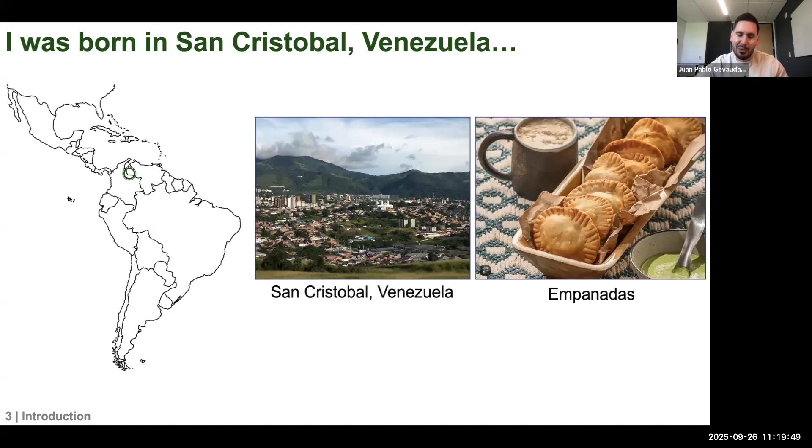And something that we have that is delicious and I am personally obsessed with is empanadas. I won't go into the difference between empanadas and what I'm showing here, which is pastelitos. I will need like another 45 minutes to really go into that detail.

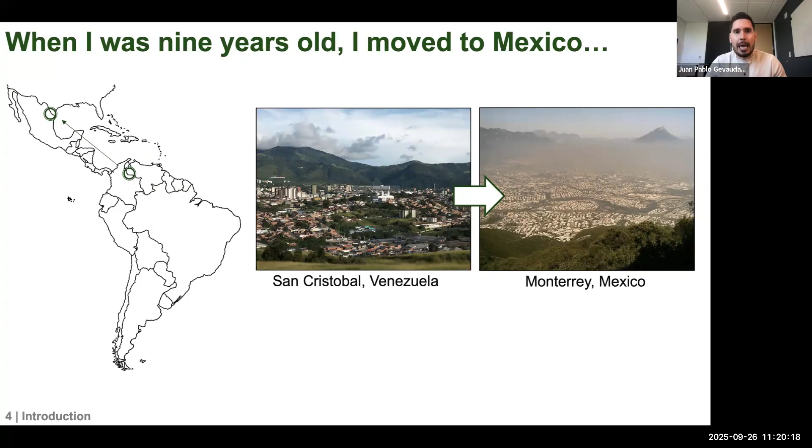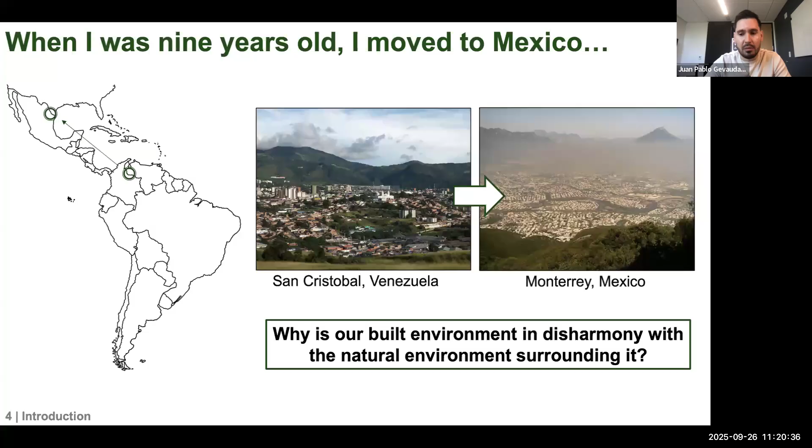But when I was there in Venezuela, I was fortunate enough to move to Mexico. And I saw something very different. When I went to Monterrey, Mexico, which is a place where me and my family would go to have picnics in the mountains, when we looked at the city, we saw this city covered with smog, right? And between where I was coming from in Venezuela to where I was in Mexico, it really created this question in my head around why is our built environment in disharmony with a natural environment? Why is that? And from an early age of 9 to my teenage years, I really had that question really form my passion for research, but also sustainability.

And of course, after going from, sorry, I just got a call.

But from going from Venezuela to Mexico to then Montana for high school, I was really developing this research vision. And it wasn't until I went to UT Austin, my bachelor's in civil engineering, that I found a passion for sustainable concrete materials. And I was fortunate enough to work with Dr. Maria Juenger, where I was able to get introduced to the wonderful world of cement chemistry.

After that, I did my master's and PhD in architectural engineering, where I found that in order to have any sustainable solution, we really need durability. And I spent a lot of time looking at acid durability of alkali-activated materials as a really great solution that could be sustainable. After that, I did a research fellowship at the University of Leeds with Dr. Susan Bernal.

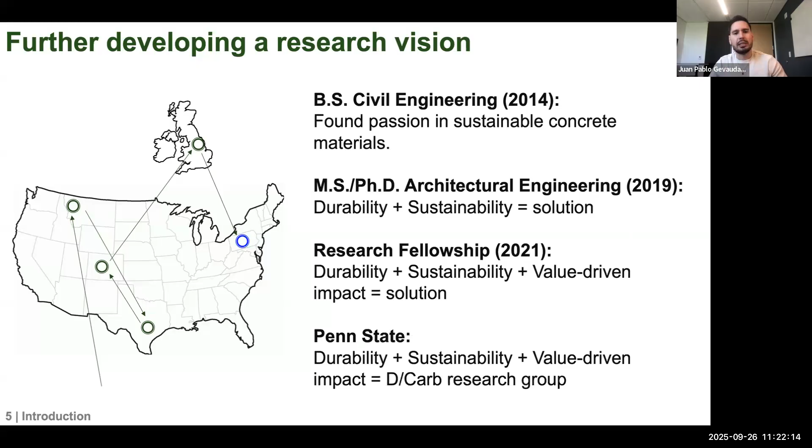And that is where I started to picture that, yes, sustainability and durability need to be part of any solution, but really, what are the technologies that are really driving value? Where should we spend most of our research energy so that we can have the most impact? And with that idea, I came back to Penn State and created the D/Carb research group.

Now, the D/Carb research group focuses on exploring the chemistry, both early and late chemistry, that dictates the process-structure-performance relationships of cement chemistry systems. Particularly, we're very interested in any cement chemistry system that has silica, a divalent cation, and carbonates. That's where we really light up and our curiosity shines.

Now, the work that I'm presenting today is thanks to the wonderful team of graduate student researchers and research technologists that we have here at Penn State. I am truly blessed to work with an amazing team. So thank you to all of them, and you'll see some of their results here today.

So now to the topic that we're here for, right? Why is there a global imperative to decarbonize the concrete sector? I know that you have had amazing speakers in this series that have addressed this topic, including Dr. Maria Juenger. Today I want to provide a slightly complementary perspective, but also look at some of the current data for where we are, how we're doing, and where we need to go.

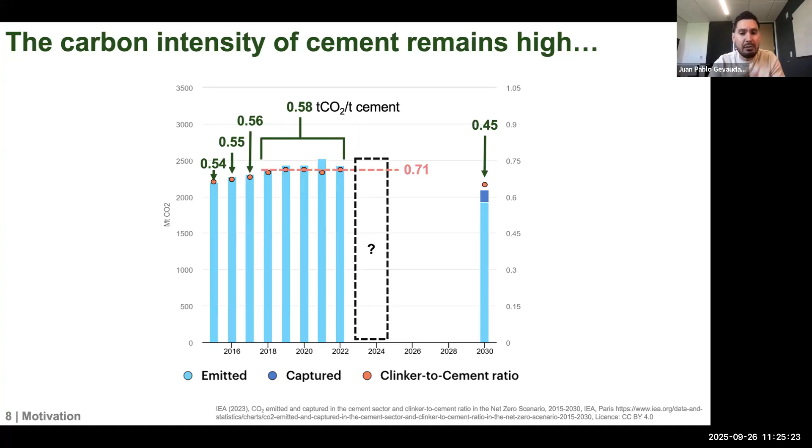But what has happened over the last few years? I couldn't find any data, so if anybody has data over the past few years, I would love to see it. But what I did find is our CO2 process emissions from cement manufacturing globally. And we see that since 2021, we have been decreasing CO2 emissions for cement manufacturing, which a lot of you may think is really great news in terms of total volume of CO2 emissions due to cement.

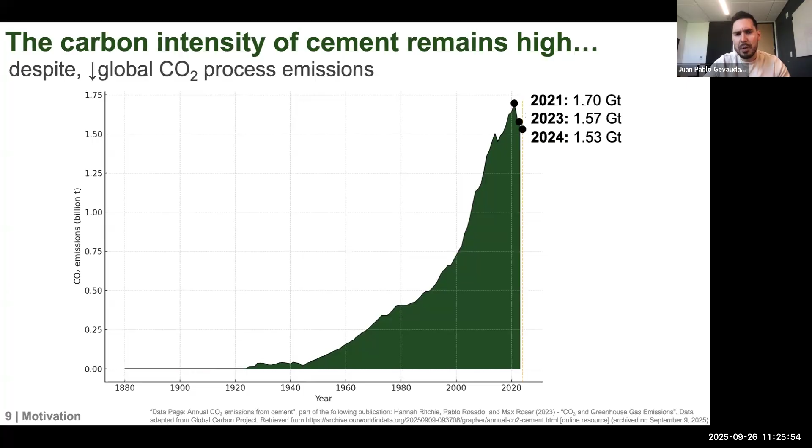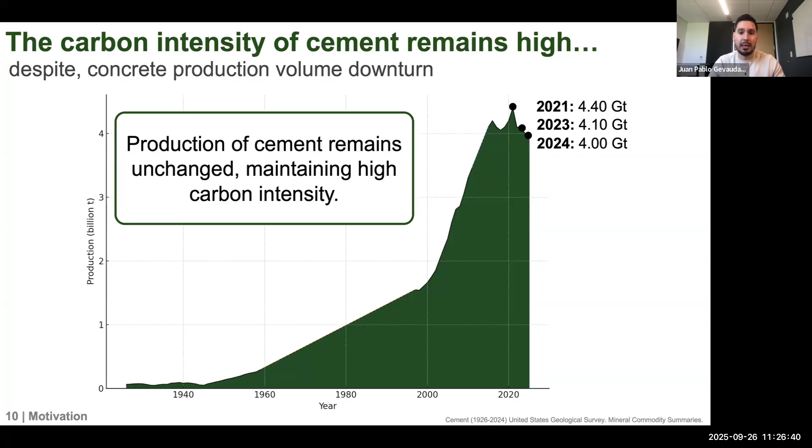But the reason those CO2 emissions have decreased is a concrete production volume downturn, particularly in the Chinese real estate market. We're producing around 4 gigatons of concrete from last year, and that's where we think we'll be stabilizing for at least a couple more years. The key takeaway is that the production of cement remains unchanged, and that's why we're maintaining that high carbon intensity in cement production. So we really need to think about how we're going to decrease cement carbon intensity.

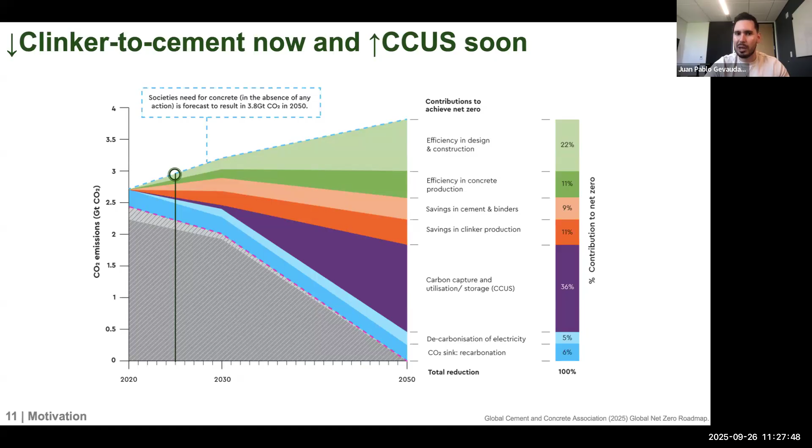A few different roadmaps have been published, and I noted here the Global Cement and Concrete Association roadmap. Of course, this is for concrete, so it takes into account not only process manufacturing, but also the fuel emissions and the concrete. In order to reach decarbonization by 2050, we need to implement a wide variety of strategies. A lot of them are efficiency strategies, like reducing the clinker to cement ratio, which we need now, but the one contributing the most to the net zero path is carbon capture, utilization, and storage. That space has a lot of different developments that we're going to be discussing today.

So why is this important? In the US, we see that SCMs have been utilized since the 1940s, particularly fly ash.

We know fly ash, that's great. But right now, poor supply logistics for the US actually inhibit the utilization of SCMs in concrete projects. This is particularly because not only is our supply of fly ash, which we know and love, decreasing, and has decreased by 65% in the past decade, but also it's because a lot of imported SCM options, yes, they're cheaper in a lot of senses, but can they get to the project? And that's what we mean by supply logistics.

Now, the other component of this is that there has been a lot of work on harvesting fly ashes. There's a lot of excitement towards using and reclaiming some of these fly ashes that have been ponded or landfilled. But even the Coal Ash Association does say that this is going to meet the demand for the next 90 years. So what I really want to encourage us all to think is future needs, right? We need to increase our domestic production of SCM at low prices that can actually compete with imported material alternatives. That's really what we need. And we need that production to happen near metropolitan areas where that concrete is actually being utilized.

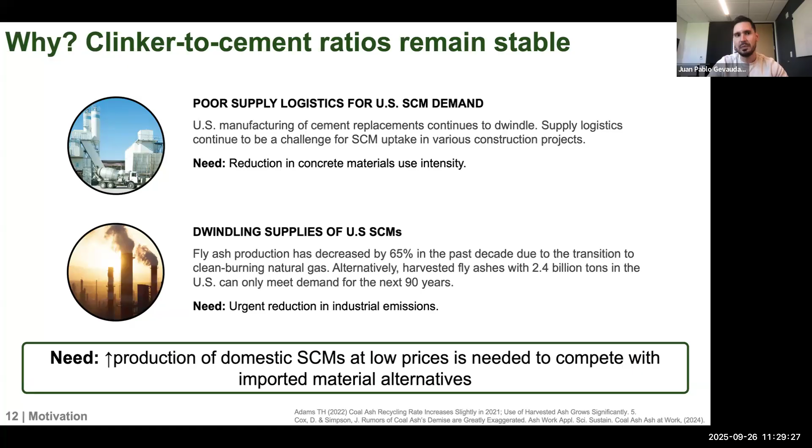All right, when we look at the other side, carbon capture, utilization, and storage, one thing that we need to keep in our minds is that the cost of CO2 is actually really high. It's around $350 to even $150 per ton of CO2 removed. And that, of course, is these complex plants that actually require high capital expenses and high operational expenses to keep this carbon capture and storage going.

Another component of this is that the installation of this technology is quite complex. We need multi-year assessments of the cap rock integrity, the geology. We need pipelines to pipe CO2. And oftentimes where the emission happens, where that cement plant is, may not be near a basalt cap rock that can actually take and store that CO2.

Interestingly enough, there was one study that looked at the feasibility and the economic impact of including carbon capture and storage in cement plant and concrete production. And they estimated that it would be a 10% premium for installing and utilizing this technology for that concrete end product. But do clients want to pay for that premium? That's another question here.

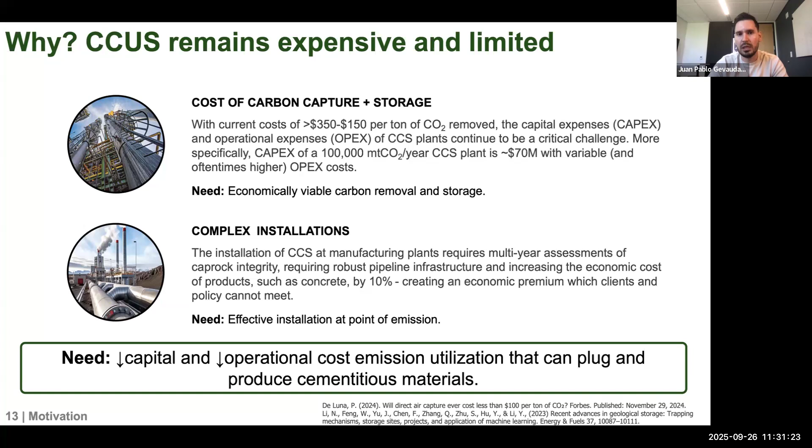So the need that we have here from our current progress in carbon capture and storage is that we need it to be a low capital, low operational cost, and almost a plug and play option and solution that can actually decarbonize different cement plants or different emitters of CO2. So with that in mind, I just painted the picture of the problem that really motivates our research.

And here at the Decarb group, we have two different research thrusts, one in process innovation and one in materials innovation. Now, for the first part of this talk, I'm gonna focus on the process innovation. This idea of, how do we create these plug and play carbon sequestering processing technologies that can also produce concrete products of interest, whether they're cement replacement, fillers, aggregates, and even precursors to alternative cements.

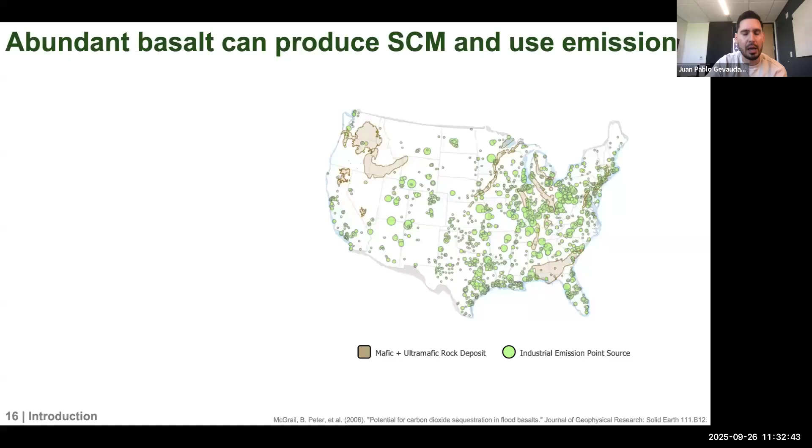So in this realm, we have been really interested in basalt. Basalt is really abundant throughout the US, and what you can see in this map published in 2006 is that the orange, brown areas are basalt and other mafic, ultramafic rock deposits. And the green is industrial emission point sources, and the diameter of those circles dictates how big that emission is. And we have some correlation between the two, not strongly, but it is available. Where basalt is, we have an emission usually, right?

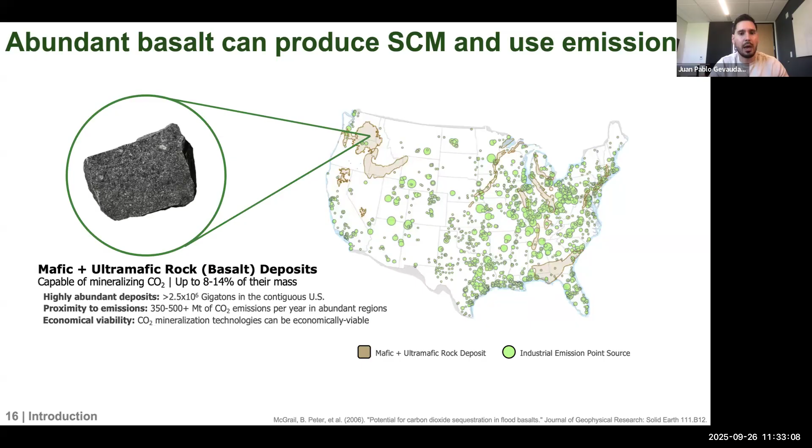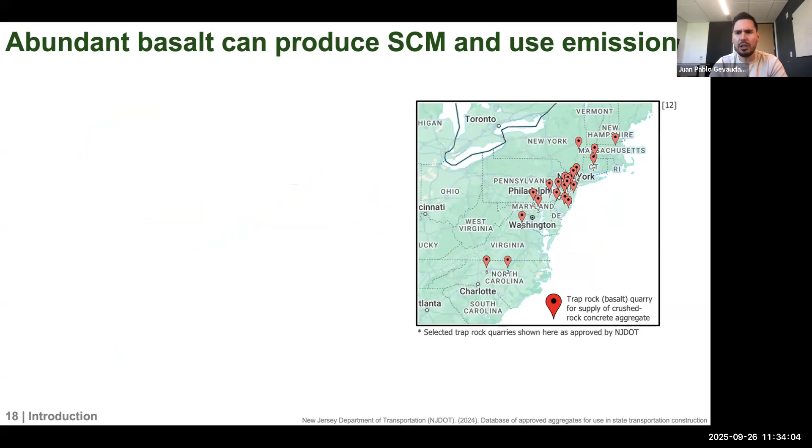Now, another thing that is really interesting is when I started looking at where basalt is actually being mined, we actually mine basalt, or in other words, trap rock, same material. We actually use it to supply aggregate. And this is actually one of the quarries here in Pennsylvania. And a lot of these are actually operated by cement producers, like Heidelberg Materials. So this is a very interesting opportunity here because not only does basalt have the right chemistry, but it's also located near metropolitan areas where we actually need cement replacements, not just aggregate.

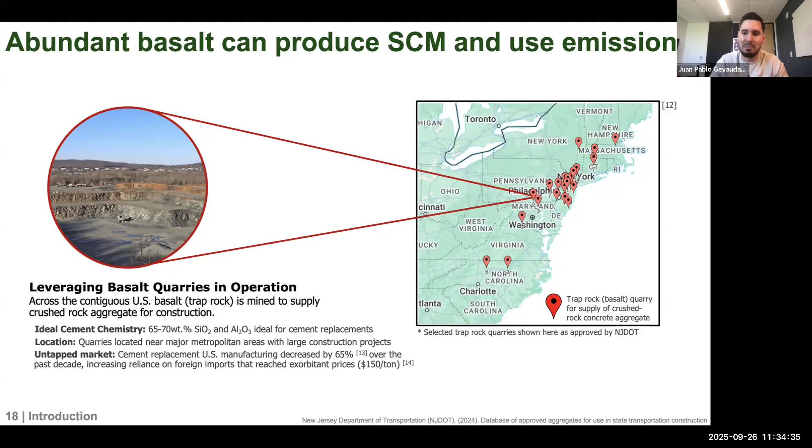So this is another really great opportunity. We have taken this a little bit further and now, plotting the basalt quarries from geodata, we can look at how far away basalt is from metropolitan areas. And if we are able to produce SCMs, could this solve some of the supply logistic issues that we talked about earlier?

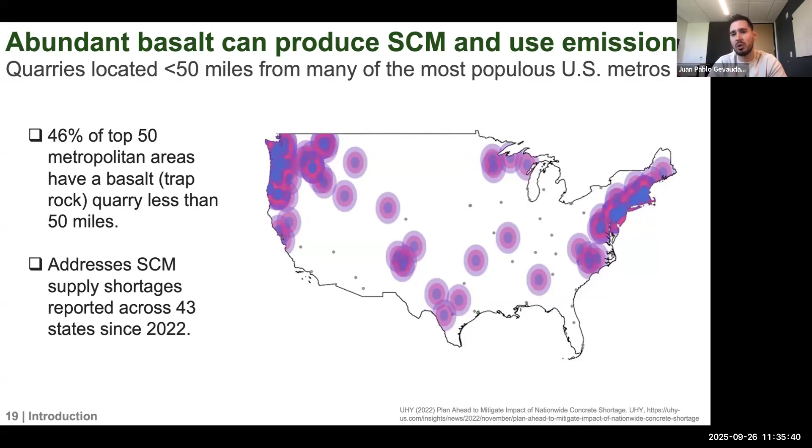So with this, and this is only preliminary work that we're using to commercialize some of the solutions, we're seeing that around 46% of the top most populous metropolitan areas can be supplied with basalt as an SCM. And this really addresses the concrete shortages that we have seen across 43 states since 2022. Something that we're really excited about, being on the East Coast, is that a lot of the basalt is available in the East Coast, which is one of the most populated areas in the US.

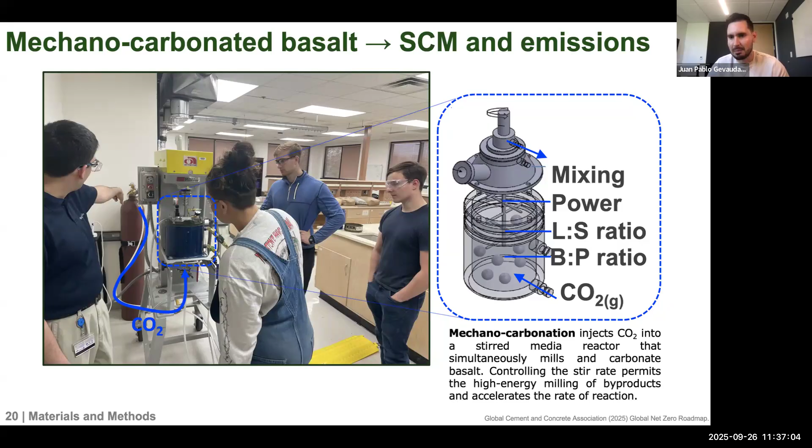What that means is that we have a paddle that is mixing beads, milling media. And as we pump CO2, we allow for that liquid and gas interface to be well mixed and also mechanically break apart the basalt and release some ions of interest. In this case, for mineral carbonation, those ions of interest are calcium and magnesium. So we have termed this process mechano-carbonation because we're simultaneously milling that basalt, mechanochemically activating the basalt, while also triggering carbonation reactions to create magnesium carbonates or calcium carbonates. So it's a simultaneous process.

Now, I would be remiss to not mention this. We are aiming for low operational energies at scale, less than 500 megajoules per ton. And that is really, really important. We actually have another set of projects creating a discrete element method model to create a digital twin so that when we scale up that reactor technology, we can achieve this low operational energy.

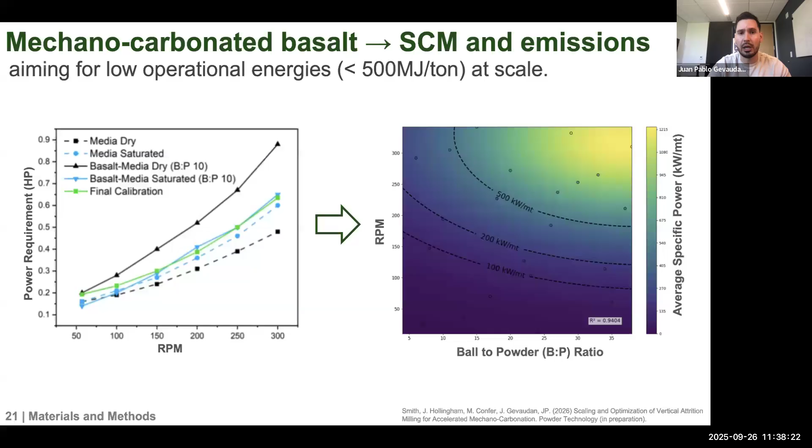On the left here, you're seeing our reactor operating at different RPMs on the x-axis and the power requirement on the y-axis. What we have done is calibrated that discrete element method model, our digital twin, with some of our experiments to make sure that when we scale it, which is on the right side, we can pick those operational parameters that lower the specific power, the kilowatts per metric ton. More work on this later, and we'll be able to share some of this in work in preparation. But it's really important that we consider how much energy we're actually using here to produce SCMs.

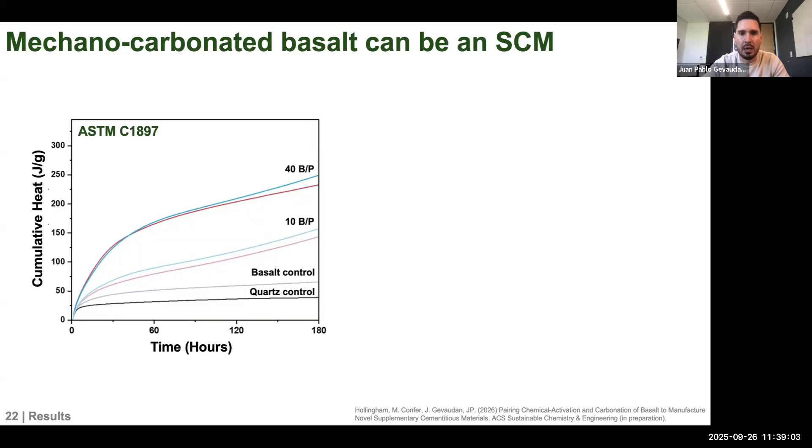Now, looking at SCMs, we can actually produce basalt SCMs from the mechano-carbonation process. You're all aware of what I'm showing here in terms of cumulative heat. This is the R3 test, and what we have is our basalt and quartz control. Something really exciting here is that the ball-to-powder ratio is the main driver for increasing the chemical reactivity of the SCM. Note that the blue is a lower RPM, around 250 RPM, and the red is the higher RPM at around 500. That's very important, again, for the energy consumption of this process.

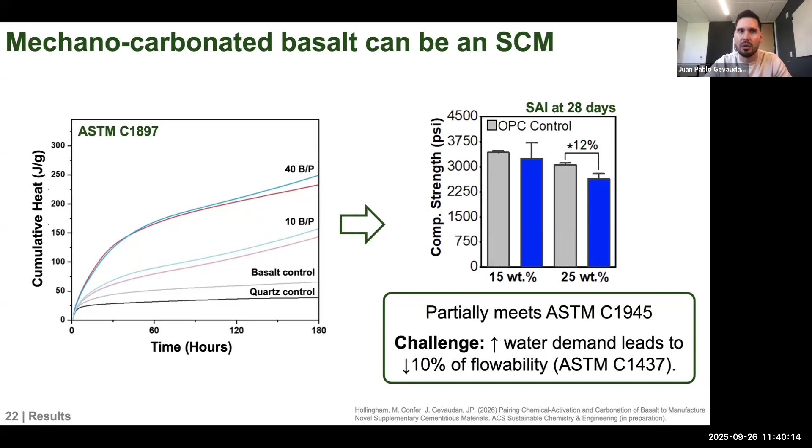Now, translating that to the strength activity index at 28 days, we see that at 25 weight percent, we actually decrease the compressive strength by 12%. The reason that is happening is because we have a challenge here. We're increasing the water demand in our basalt SCMs, which then decreases the flowability of our mixtures. So the water demand right now is the biggest issue that we need to overcome in these manufactured SCMs for them to be applicable and used in the field. We're actively working on that, and hopefully I'll be able to share some other papers on our advances soon.

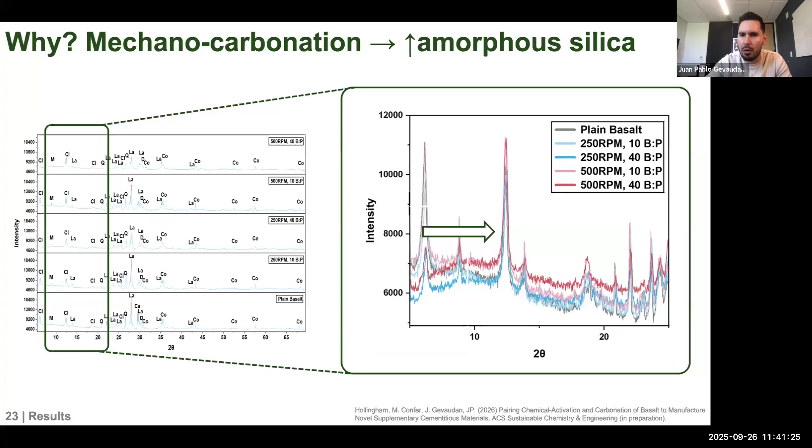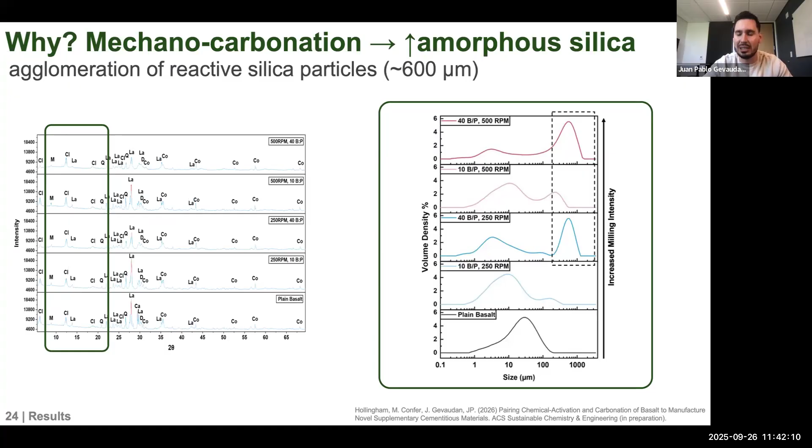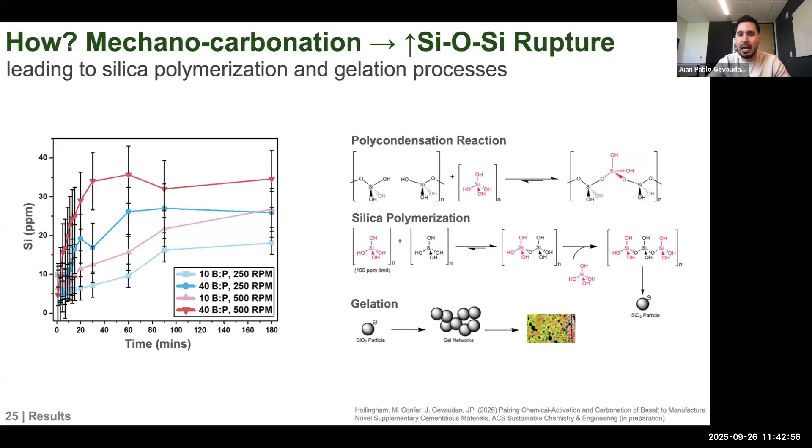Now, the silica polymerization happens quite rapidly and leads to gelation, which is the idea of these polymers going from oligomers into higher chain polymers and essentially creating a silicate gel that has a negative surface charge. Now, because we are also releasing magnesium and calcium, which I'm not showing here, that also allows for gelation to speed up and form, as we have shown in previous work.

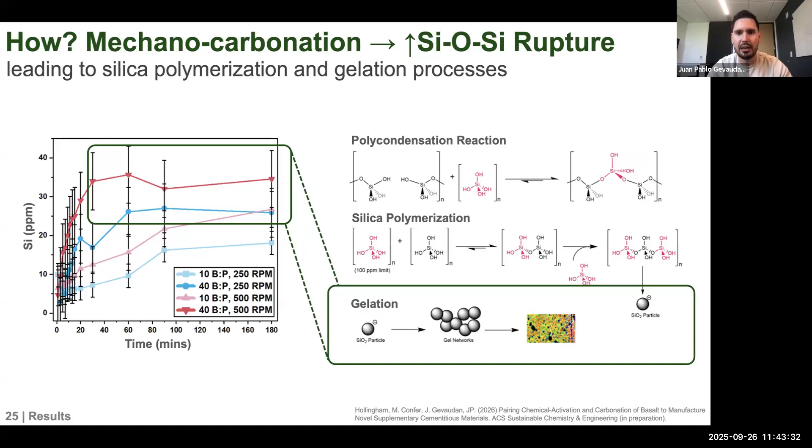So this is where we stand in terms of our understanding of this process, but I haven't talked about carbonation, right? And what we see is that mechano-carbonation, again, in our case happening with basalt at ambient temperature and pressure, is really happening at near neutral pHs. And it turns out that even after mechano-carbonation, from 2 weeks to even 8 weeks, the slurries actually can form calcium carbonate, but it's a very slow process of formation.

And when we looked at the XRD of these carbonates forming very slowly over time for all of our samples across different processing conditions, we see that the higher energy milling conditions actually produce aragonite, while some of the lower RPM, lower energy conditions produced more stable calcite forms of calcium carbonate. And this is really exciting for us because it points to a very basic fundamental problem, which is all related to non-classical crystallization of calcium and magnesium. I won't talk a lot about non-classical crystallization in this presentation, but it is a very fundamental and fascinating challenge that we're looking into because it really dictates the mechanisms here.

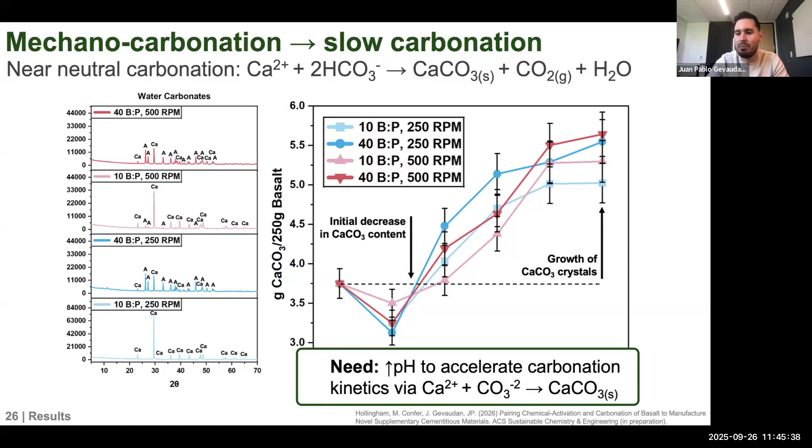So here's where I want to shift your paradigms around emissions and start to think about emissions as resources. What we know is that cement plants actually emit particulate emissions. Around 5% of global emissions for PM10 and PM2.5 is due to concrete production. So PM, particulate matter, comes in different sizes. And the reason why these are so harmful is that once you breathe in particulate matter of 5 microns, 2.5 microns, or even 10 microns, they have a really hard time leaving your lungs. So when they accumulate in your lungs, they can cause a lot of different issues.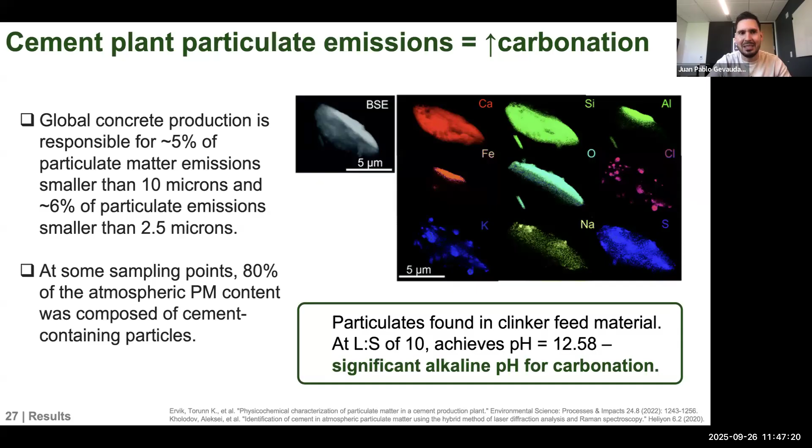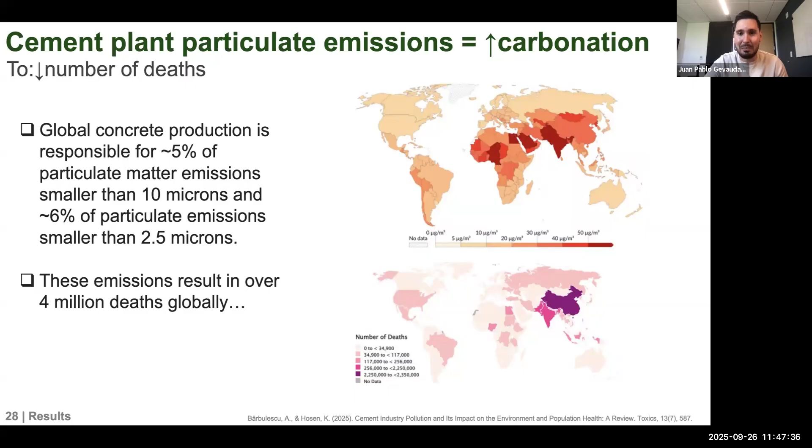Now, the problem here with particulate emissions that I just alluded to is that there are worldwide 4 million deaths happening due to particulate emissions from cement manufacturing. And when you look at the external costs associated with cement manufacturing, this is a great study by Sabbie Miller. It shows that in the US, it's $90 per ton of cement as an external cost. And that external cost is due to health outcomes, but also environmental degradation that is happening near cement plants.

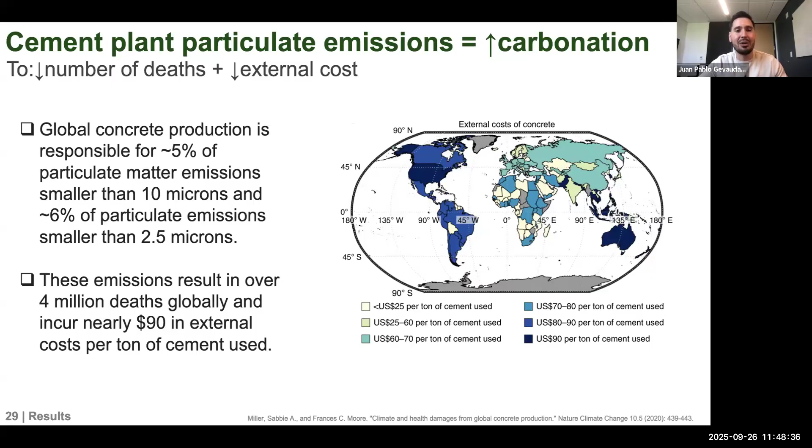So we really need to be thinking about solutions that are addressing not only the carbon intensity, the CO2, but also looking at other emissions that are problematic in the cement industry. What we think here, though, is that by including particulate emissions in our technology, as well as CO2, we can create a synergistic opportunity where the cement particles, particulate emissions, increase the pH. Those allow us to increase the rate of carbon sequestration.

And just to drive home the point a little bit further, this is really, really important right now because this paradigm shift is also associated with the fact that over the past few years, we have increased our reliance on imported cement in the US. Particularly, that is because we're also closing plants in the US. We have actually closed 4 cement production plants in the past couple of years. And that is because the retrofits for those plants are really expensive to meet the new regulation for particulate matter emissions. So this is a very important problem.

And what we're trying to think here is about a win-win-win strategy. One where we can prevent cement plant closures, so we can still continue to produce cement in the US. We can improve mineral carbonation by making sure that there is a high pH. And as well, we can produce a class N pozzolan from abundant basalt resources.

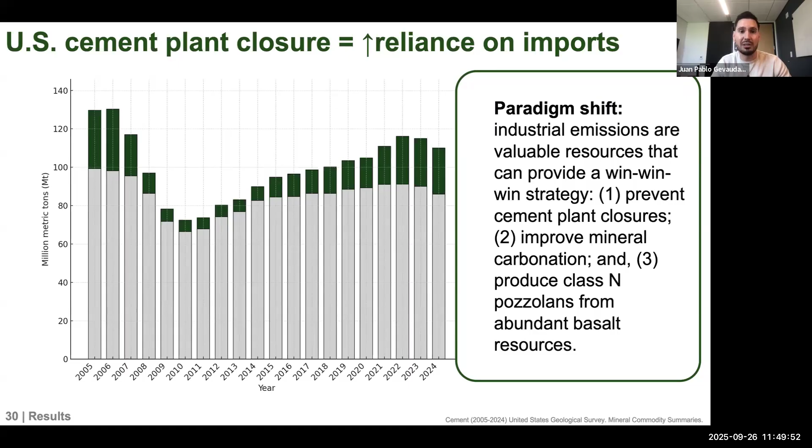So in order to drive this technology further, we're also interested in how it translates and how we can look at real world issues. In particular, here we're installing a plug and play pilot for one of our on-campus gas power boilers, where we can look at diluted flue gas effluents. In this case at Penn State, we're really trying to work on the effect of sulfur and nitrogen oxides in emissions and how those could also affect the carbonation reaction rates that I just showed at near neutral pHs.

The idea is that we can take this cart, as you can see here in this CAD drawing, and we can plug it into other cement plant effluents and emissions and really test out the synergistic ability of particulate matter to increase those carbonation reaction rates. So more on this later. We're actually working towards installing the pilot plant, and then later on in 2026, doing some concrete sidewalks with the basalt SCMs that we have produced to really demonstrate the opportunity for these manufactured SCMs to be applicable.

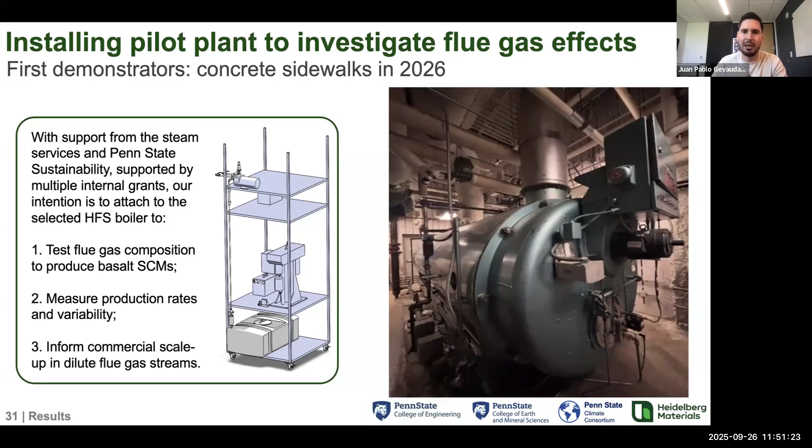All right, so I know I am running out of time, but I wanted to give you a brief overview of some of the carbon negative cement work that we have been doing here in my lab, really focusing on magnesia-based cements because they're often touted as the first carbon negative cementitious material. There are a lot of really fascinating questions that we have around their hydration. So I wanted to just give you a little glimpse of that and some of the work that we just published this past month.

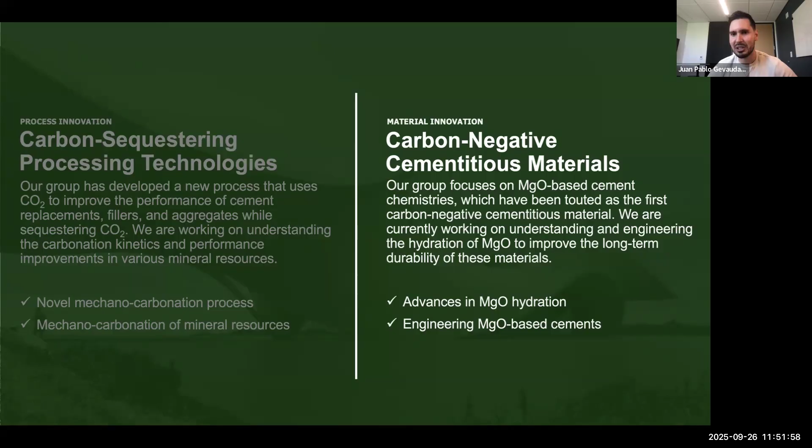So the first thing is just framing the problem. Right now, the magnesium oxide that a lot of work is using is lightly burned magnesia that is produced commercially, or magnesia that is produced in lab conditions through the calcination of brucite or magnesium carbonate. What we found is that the production of that magnesia, specifically in lab conditions, varies in terms of the temperature of calcination. So we started to look at two different precursors for magnesia, magnesium carbonate and magnesium hydroxide, and at different calcination temperatures that we would see in the literature.

And for magnesium carbonate, what you can see here on the left is that the percentage of magnesia increases, in white on the lower left-hand corner here. But you can see that magnesia nucleates on the surface as these little globule nuclei that eventually cover that needle-like morphology of this hydrous magnesium carbonate. However, very interestingly enough, brucite retains its structure. It doesn't really change much, even though it's converting to magnesium oxide.

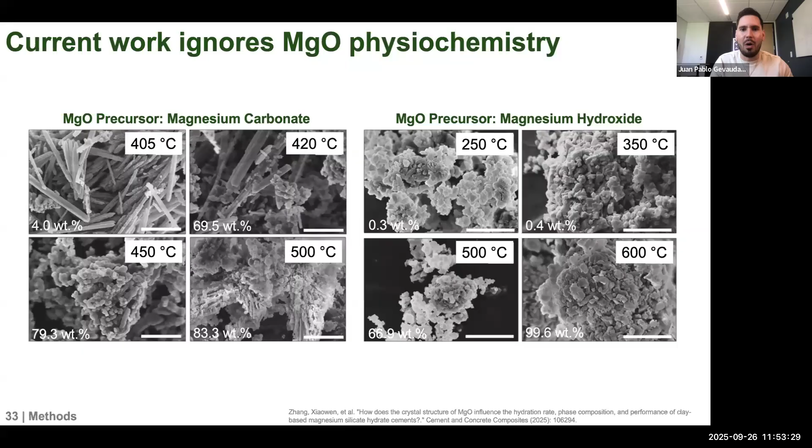So what we concluded in this study, just to give you again this brief overview, but if you're curious, go to the reference here in the lower right-hand corner if you want to look at all the data that supports this overview. For carbonate-derived magnesium oxide, what we see here is that there is a selective dissolution that is happening for the precursors, all right?

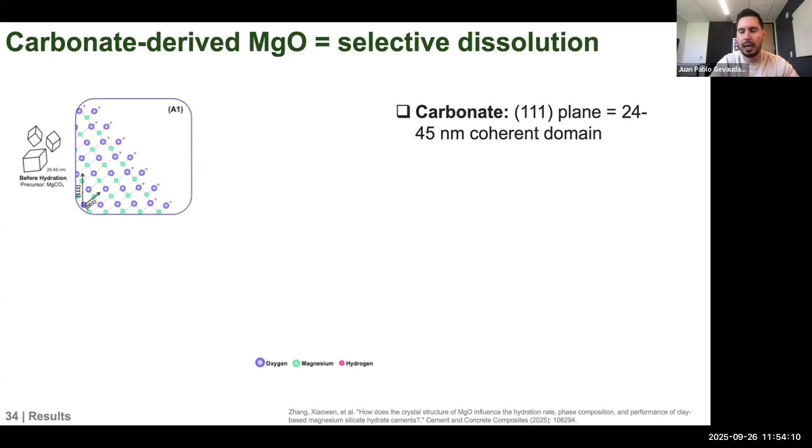And the way that we were able to look at that is by really focusing on the 111 plane of the magnesium oxide produced, which was around 24 to 45 nanometers in that coherent domain through the XRD data that we collected. Now, after hydration, we were able to look at that 111 plane again and see that it actually decreased in terms of that coherent domain, and that what increased in magnesium oxide is the 002 plane, which is aligned with what other research shows in previous work.

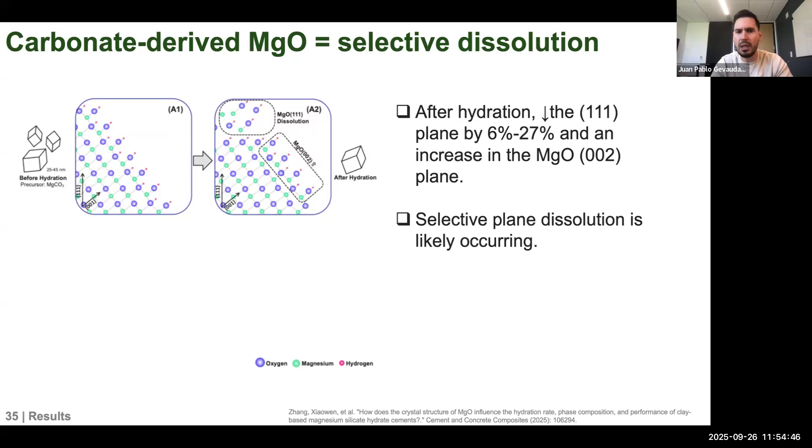But what is fascinating here is that there seems to be this selective plane dissolution that is likely occurring in carbonate-derived magnesium oxide. Now, is this the same for brucite? No, it's not. With brucite it is important to understand that it has these brucite nucleation sites, and it has a smaller crystallite size for that 111 plane of the magnesium oxide produced.

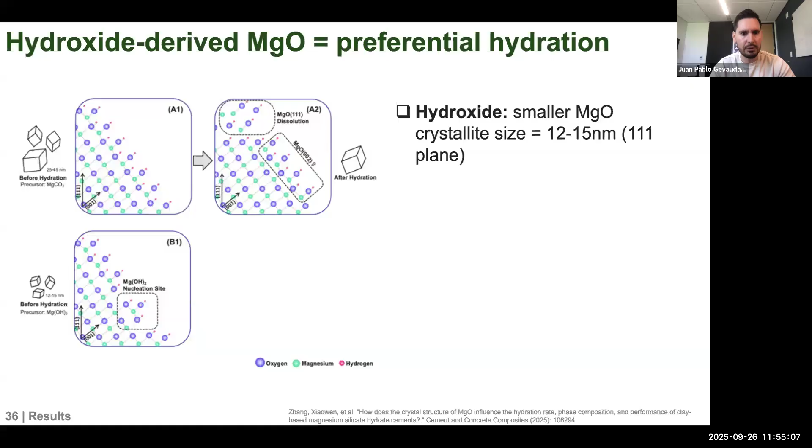That is really important because after hydration in the cement, we see that there is likely the formation of this lamella structure because we see evidence of the 0001 plane for magnesium hydroxide. Now, the interesting thing here is that the 111 plane of magnesia and the 0001 plane of brucite are topotactically related. So it's almost like you're unzipping a zipper when you're hydrating that magnesia from brucite.

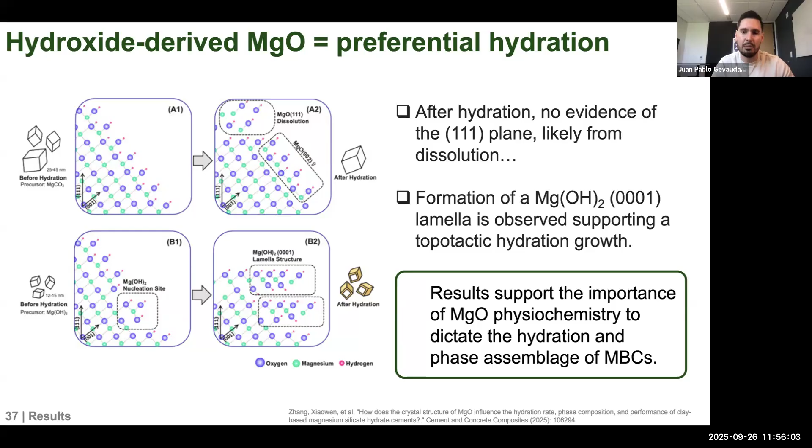And really what these results show is that there is a critical importance on the physiochemistry of that magnesium oxide. The physiochemical properties of magnesia really matter to dictate the hydration and the phase assemblage of any magnesia-based cement. And if that is not convincing you, then let's look at some of the strength results that we have.

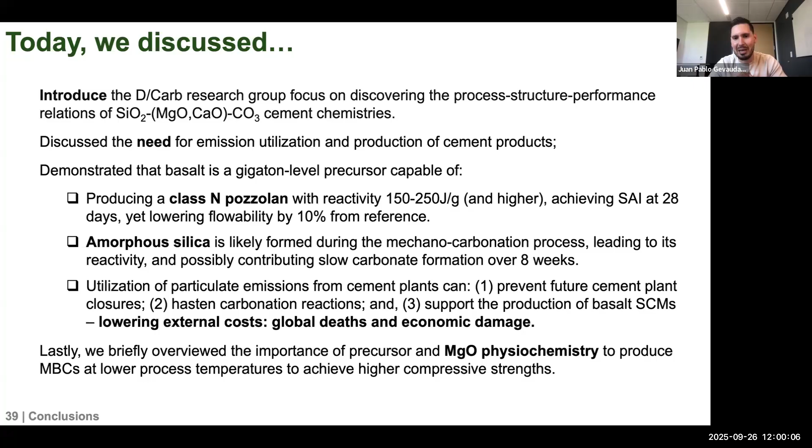to mineralize CO2 and support the production of basalt SCMs to lower not only some of the supply logistics that are troublesome right now, but also lower external costs, particularly global deaths and economic damage from cement production. Now, lastly, we overviewed really quickly some of our work with magnesia-based cements, and I'm happy to answer any questions that you may have on that work or some of our other work in this space.